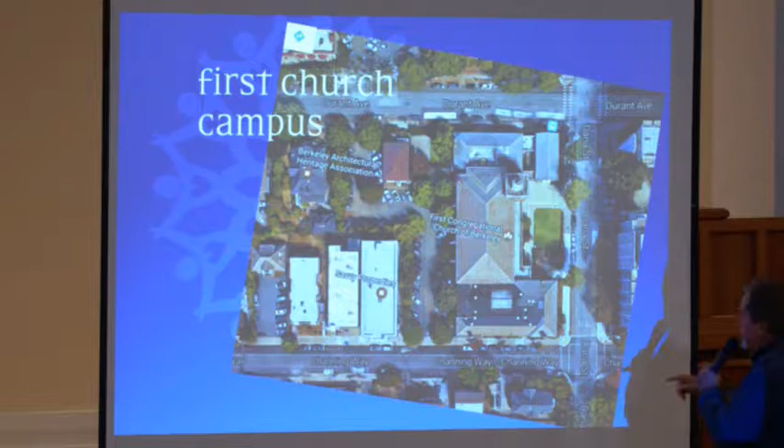Google map look at our campus. As you can see, this right here is Pilgrim Hall. This is the sanctuary. We've got the Plymouth House over here and the chapel. And then the parking lot, which sort of zigzags through here.

I guess the next slide shows the lots, right? So we'll go to there. The way that this is set up is that there is one large lot here that Plymouth House, Chapel, Sanctuary and Pilgrim Hall is on. It probably used to be a bunch of little lots, probably like this size, here, here, here, but they were all combined at some point after the church bought the building, bought the property.

The sanctuary was built first. This building was built first. It is made out of steel and brick for the most part. There's some wood framing in it too, but the main structure is a steel frame building. Pilgrim Hall is a wood frame building, despite the fact that it looks like it has bricks on it. It has bricks on the outside, attached to the wood frame of the building.

So these two buildings up here, which we're really not talking about, are a combination of steel and brick too. So they're pretty substantial buildings.

So you can see here we have this one big lot, and we have these other lots over here. We'll be talking about those lots at the third option. But right now, let's look at this lot.

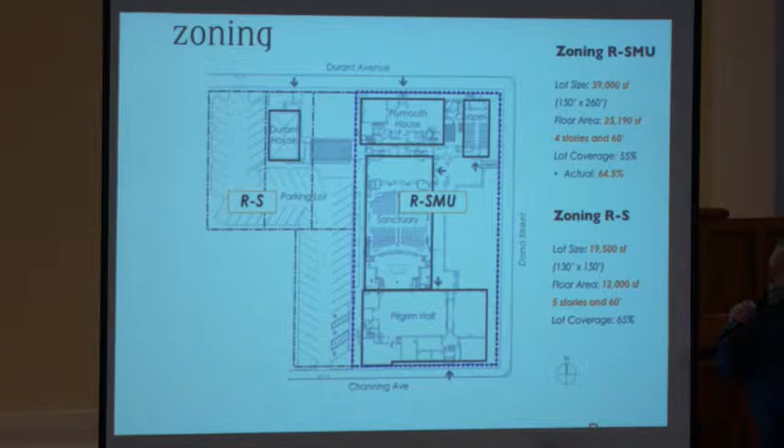We also are allowed to go another story on our building if we wanted to. That is, we could do that, and in certain circumstances we could even go higher. So let's go to the next slide here.

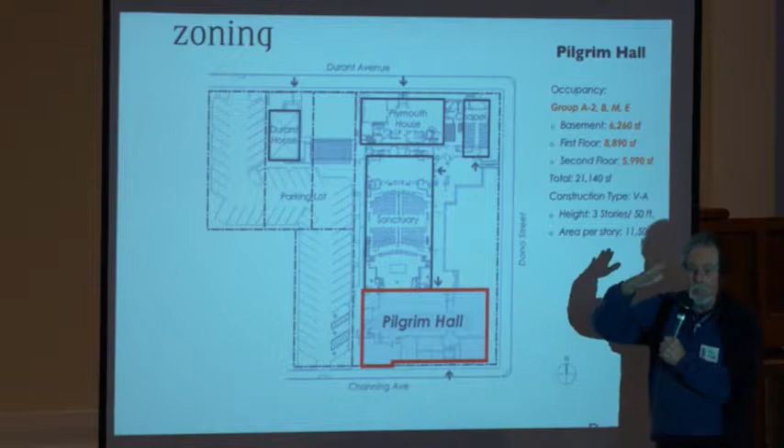So anyway, we're gonna mostly talk about Pilgrim Hall, but I just wanted to give it to you in context. Pilgrim Hall was built second, right after this building, the year afterwards. One of the things they did was build this portion of the wall shared with this building — they put steel columns inside that wall and attached them, so that the building is kind of a lean-to, to some degree, onto the sanctuary building.

And also when they built it — let's look at the next slide here — it was originally made mostly for athletics, the basketball court, and that was the main use there. There were no staff offices to speak of. There were some, but not nearly as much as it's used now. Obviously no thrift shop or anything, but it was mostly for the activities of the church, not as a community building the way we've learned to use it.

So this is just going over here — we're a high density area. The lot coverage allowed is 50 to 55%. We are now at about 65% of it.

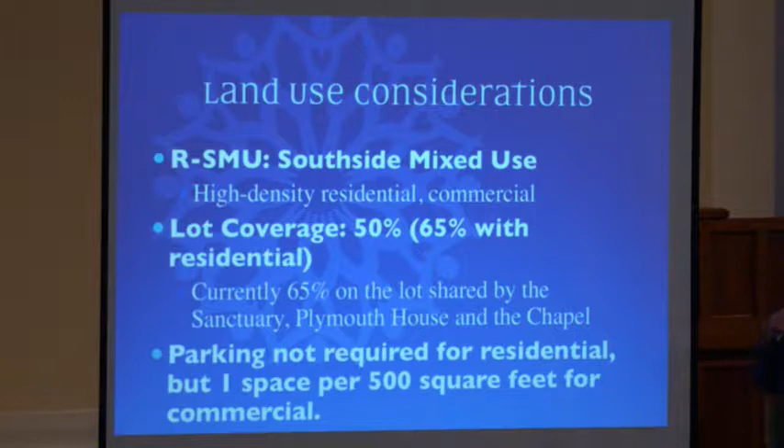There is the parking requirement — Berkeley is trying to encourage people to use public transportation. So if we were to build any residential space on this property, we would not be required to provide parking spaces. But if we increase the amount of commercial space, we would have to have one space for every 500 square feet. I think that because we have our existing parking lot, we would probably not be restricted by that. So let's go to the next one here.

So some of the issues that are going to come up, no matter what option we choose, are landmarks and preservation issues. If we end up substantially changing the outside of our building or removing any portions of it, we will have to go through a process that involves public hearings and so on. We're not actually a landmark on any register, but we are a building of note, and there could be a process where others attempt to make this building a local landmark.

So we do have preservationists right next door — BAHA is in the building right next to our parking lot. We do have a legal right to get an exemption from historic preservation laws. However, it could still be challenged in court, and it could take quite a while.

For those of you that were around when the Presbyterians did their expansion, they spent at least 3 or so years fighting preservation battles. So, the next slide.

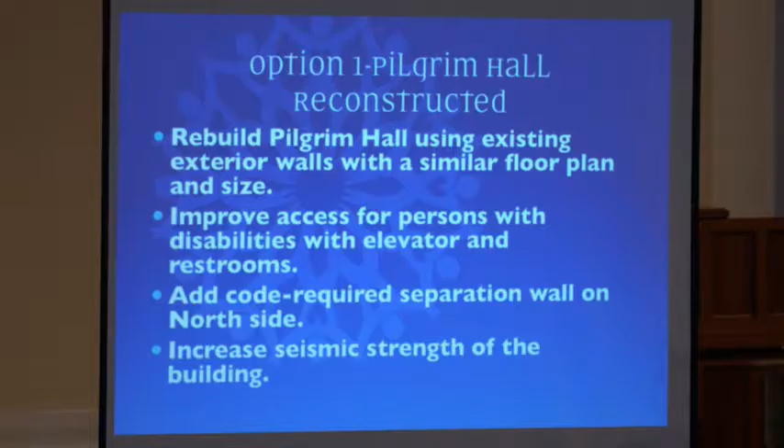It will have increased seismic strength, but it will not meet the current fairly stringent seismic code. So, the next slide here—this is just to familiarize you a little bit with what is going on.

After looking at this building and the other building, I'm not sure exactly what happened, but Pilgrim Hall was not built to the same kind of more rigid standards. It's a wood frame building, and they compromised a number of things. One odd thing is that underneath the large assembly, there's just a big mound of dirt. It seemed like, why didn't they just excavate that and use the space? But whatever, they didn't. So one of the ideas we'll be seeing is, why don't we just dig it out and use it, since it's already surrounded by walls and foundations. Anyway, that's kind of unusual.

And it also relates to the other building—the floors and everything relate to it. They knew exactly how it was going to be done. I think the two buildings were probably designed around the same time.

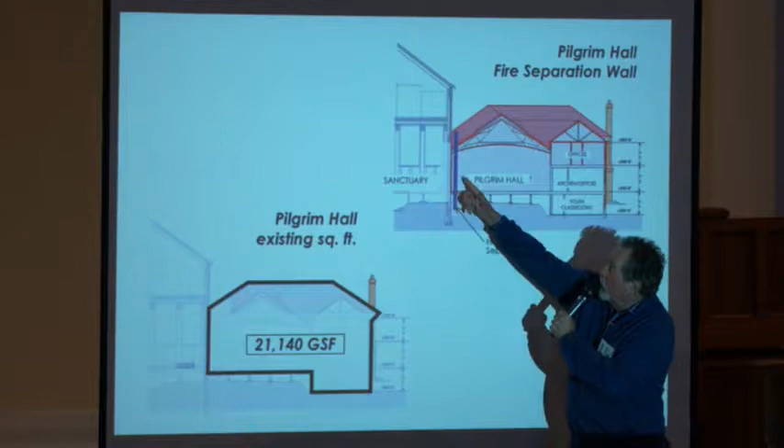So the next one here—this is where the wall would go between Pilgrim Hall, and there would be a little gap between the two buildings. If you think of the floor plans, the basement is sort of a U shape, the main floor goes all the way across, and the upstairs is sort of a U shape again. So in order to get that big, light, open feeling room, it sacrifices quite a bit of space. But there are some ways to work with that, as you'll see in the next expanded version.

So just the summary of benefits: it would be the shortest project time. We don't have to go through any big public hearings about how the thing would look. We'd just be able to get a building permit if we didn't change too much on the outside. It would be less costly than adding more space and digging out mounds of dirt and that kind of thing.

We would get some upgrades, but not a fully upgraded modern building. It would be about the same size. The interior would look all completely new—for some of the pictures you've seen, all the plaster has been stripped off, everything's gone. We would start from the bare studs, put new finishes on it, new electrical, new floors, carpeting, lighting, everything. So it will all look brand new no matter what we do. It's just a matter of how it's configured inside.

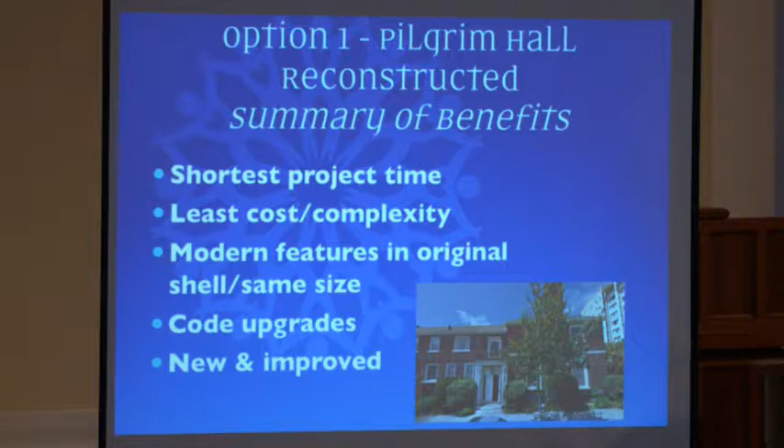Okay, clarifying questions. All right, Mary, you want to?

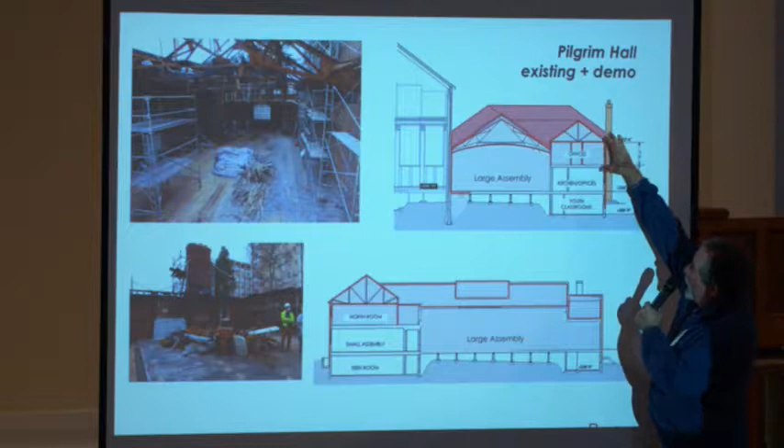Can we go back to the picture of the building, the sections? Okay, so to answer that question broadly - the seismic strength of the building, everything on the upper floor here would be completely up to grade, up to seismic code. We'd have to bring the strength to hold that up all the way down to the foundation, which would probably mean plywood on the insides of these walls. But we wouldn't have to bring the entire building up to full seismic strength, because the code says we're only required to make the replacement parts meet the exact same code it is now. So it will be partial. We could voluntarily do a lot more, and I think we probably would, because it's relatively easy - it's all opened up now.

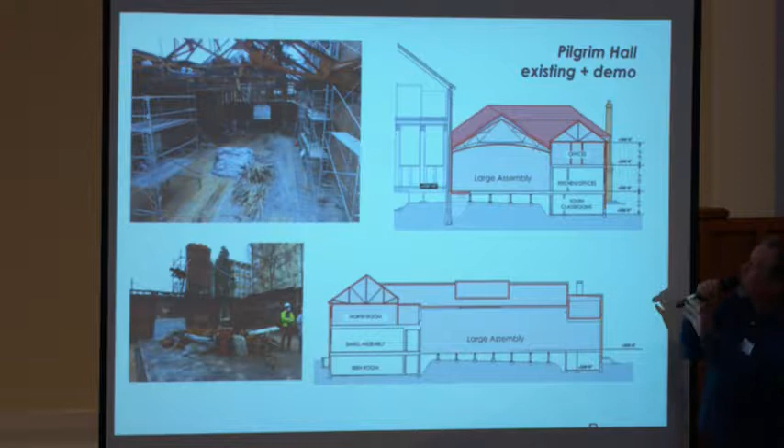Putting on more bolts and plywood would be a good thing to do. These red lines show what's gone - this part from here down has been stripped, but the rest up here will have to be removed too. So there are parts that are still there, but they'll have to come down. The whole roof, all the walls here, all these trusses up in the large assembly will have to be taken down.

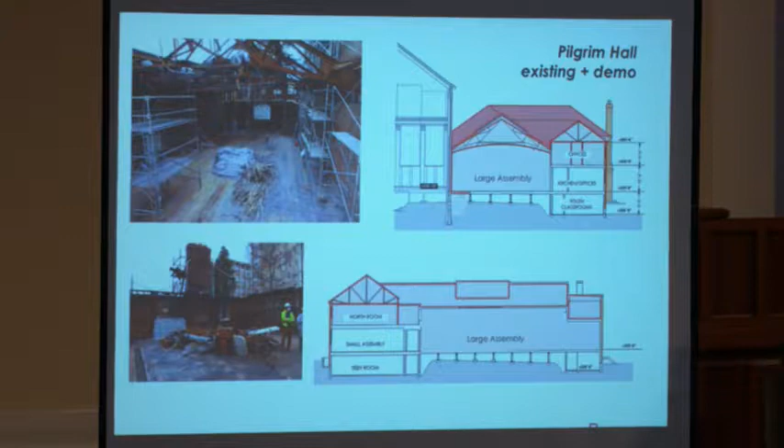Mo, over here - if we build to this plan, we won't have too much trouble with preservationists. But if we were to put another story on, could we do it in such a way that we wouldn't run into trouble with preservationists? There would for sure be more public hearings, and that depends on how we build it. If it had the same Georgian look and everything, we could do it, yeah.

I was wondering if the fireplace that's presently in the small assembly would go away, and also those chimneys that stick up that can fall down in seismic events—are they going to go away? Well, they were previously restrained by the roof, so we'd have to do some additional reinforcement to them if we were to leave them. They are almost a decorative feature of the building.

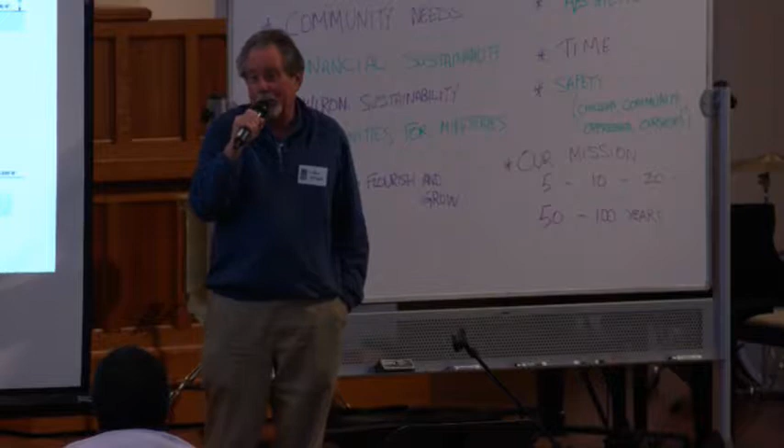Mo, just in rough numbers, can you tell us approximate cost and approximate time? Well, actually that's a slide coming up, but I'll give you a preview. We think it's about $6 million to replace the building, as we talked about with the upgrades. It will take about a year to get the permits and draw it all up, and then at least 18 months or so to build out the building.

Do you have any idea where the elevator would be in connection with all of this? Somewhere near a door to get in.

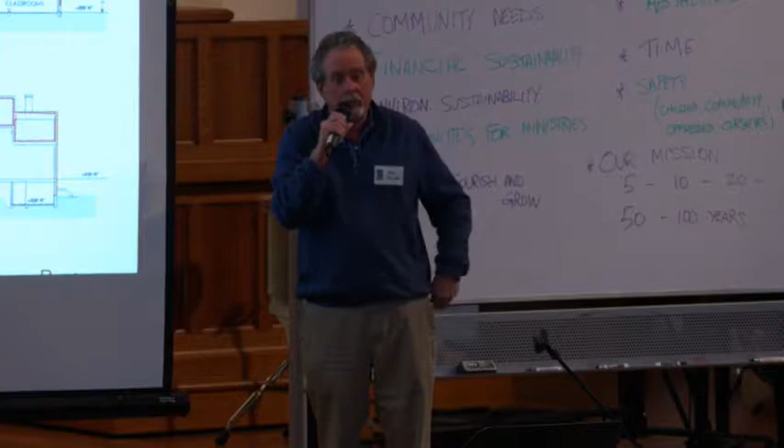There are a lot of definitions of green buildings, but the current code, which California adopted—called CalGreen for short—essentially makes almost all buildings LEED silver or gold, as it used to be called, without all the documentation. There are higher insulation requirements, higher efficiency lighting, high efficiency heating systems. So it's pretty darn green—a lot more efficient than that building was in September of last year.

Maybe we need to do the next group here. Hi, Mo—I wondered if the issues of historic preservation are linked with the need for community meetings. In other words, when in the initial slide you talked about needing to have the neighborhood review plans, would that happen no matter which plan we have, or only if we deviate from the current frame?

Okay, so in Berkeley there's something called the Landmarks Commission, which deals with preservation issues. If you're not changing anything on the outside of the building, you don't go through them. There may be at least one level of design review, done by the staff at the planning department. But if we didn't really change anything on the outside, there would be no public hearing about that—there would just be a design review, in any case.

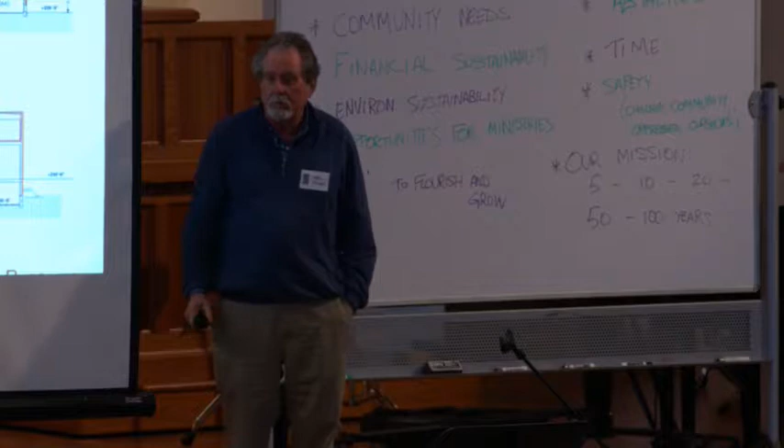Good morning, Mo. Right here, Constance. Hey, what's up? So, Constance.

I have a question about the bricks, because we kind of mentioned it, kind of not. So if we don't use the bricks, can we sell them? No, I'm being serious. Those bricks are all covered with mortar. Maybe we can sell them to members of the congregation for sentimental value, but otherwise they'd look like a pile of bricks to anybody else.

So we're going to move on to the next group. Could I just ask one clarifying final question of Mo? You commented on the time frame—could you just restate that? Did I hear one year for permits and a year and a half for construction?

The time frame is going to be—we're going to compare all the different options: money, time, this and that. So when you're familiar with the options, you'll see the different time.

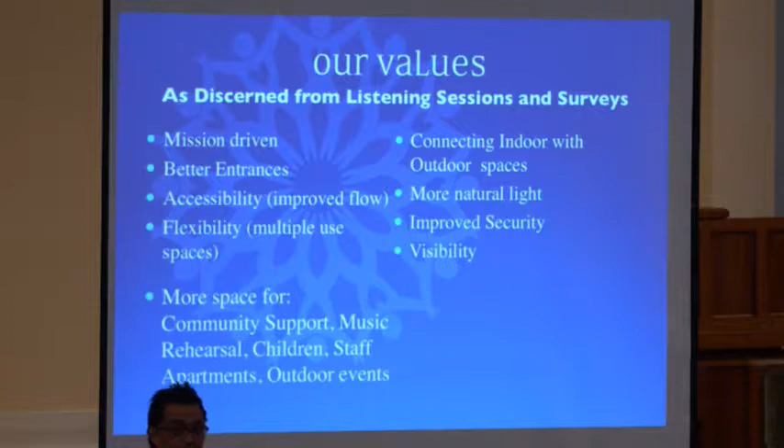Option 2 is born of an idea of what we think now is going to happen for the next 100 years, hence the title of the program. It comes from just planning, from the idea of being a master builder, an architect. You envision what the building might become, and you design and build it that way. But where you start is you go back to your values, what we determine through listening to people, what we understand is the mission of the church. We go through these values and look at better entrances, accessibility, flexibility, connected indoor-outdoor spaces, more natural light. All of these are the parameters an architect uses to understand what the space is going to look like.

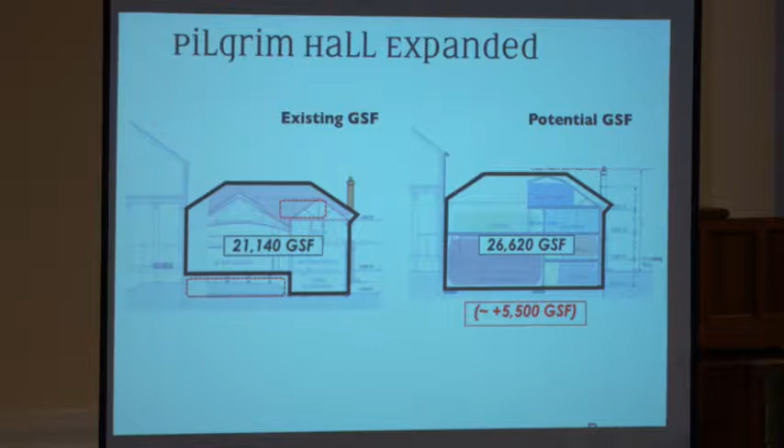So if you think about what Mo introduced, the idea of utilizing this space a little bit more, just by doing that you already add an extra 5,500 square feet. That's where we start. We use the same exact shell, not exactly the envelope, but the same shell. So within that same shell, what can we do with it? Now this is only an option. We don't necessarily have to stick to that height restriction, as Mo said. We could go one more story.

We worked with Radcliffe on this and developed these planning themes. They're listed right next to each other so we could get a sense of what the spaces look like relative to how they're meeting our needs right now. So that's the campus.

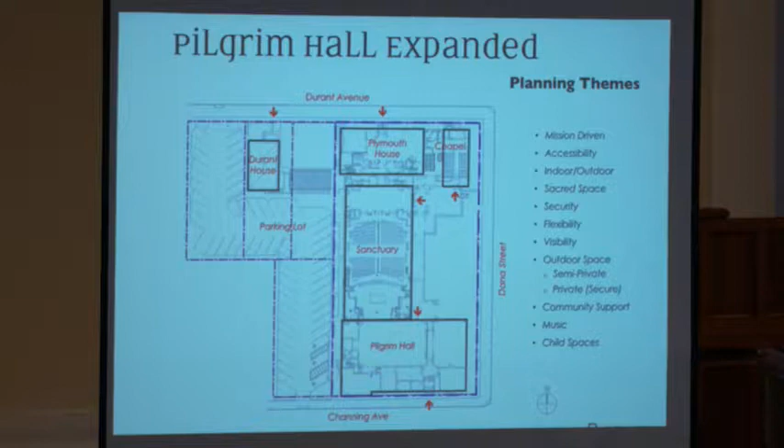In doing so, you start with a couple of different concepts. As a designer, you think about flow—how do you get from one space to another? The first thing we did was create a circulation corridor, in essence, that meets the entire campus. So if you were to walk through this corridor, you'd see all the spaces you're using, needing, and experiencing.

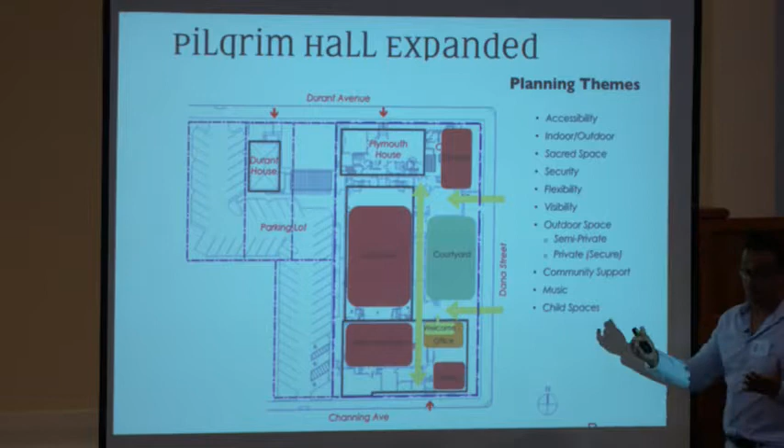The other concept is, with that circulation corridor, you create a central hub that may become the main entrance. In that space you'd have a welcoming reception area—semi-public, semi-private—that allows people to walk through, and our receptionists can see them and greet them, which is something we just didn't have before.

Let's see, move on. Whoops, all right.

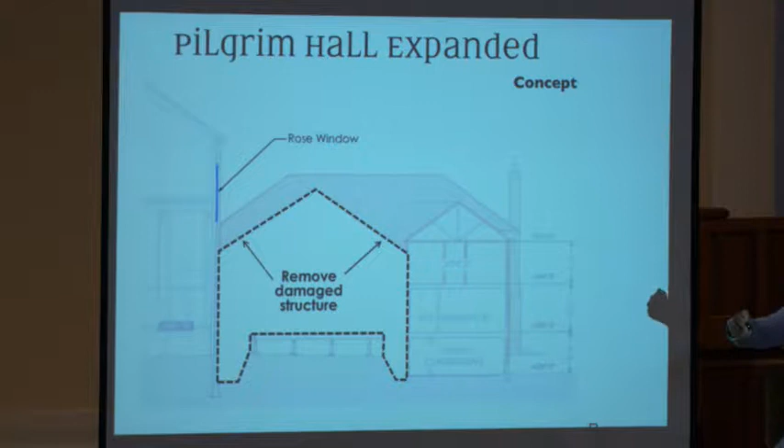So we remove the damaged structure, and we go to the walls that we talked about. The separation comes from seismic concerns, of course, but also general movement. What you really want is your roof loads to be transferred down to the foundation, so you really need that wall.

We can certainly rebuild it to match. We've got the roof in place, in space. We've got the classrooms down here.

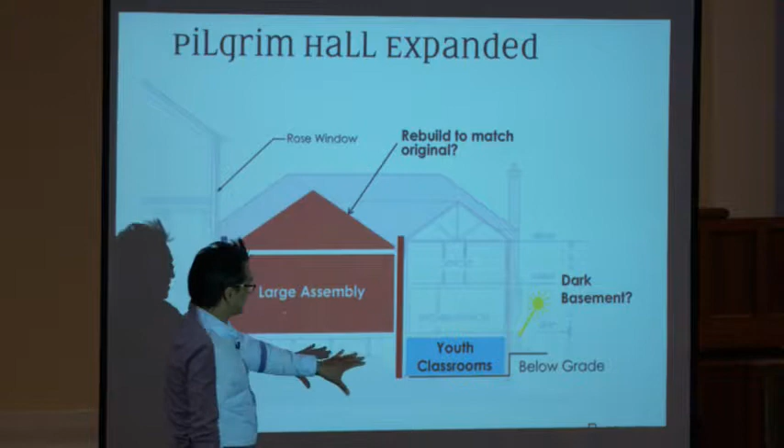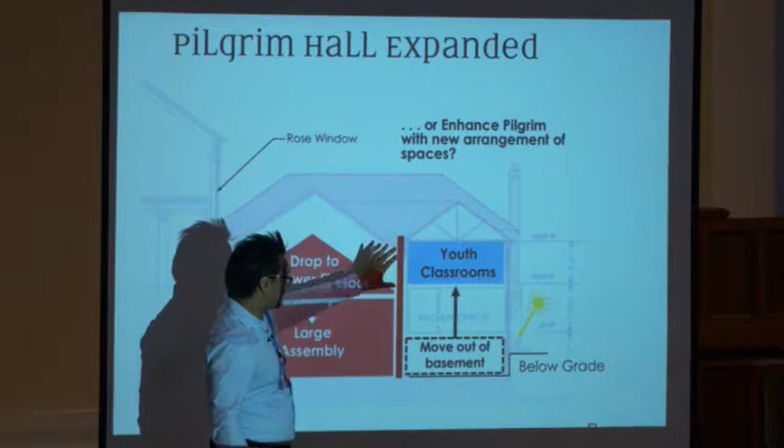Not so great. But we also understand that we don't necessarily need to pitch our roofs to get positive drainage. So what if we drop the large assembly to the lower floor, excavate out, drop it down. We could then move the classrooms away from the basement somewhere else. Flatten that roof, and all of a sudden you have classrooms and youth spaces accessible to a roof area, garden.

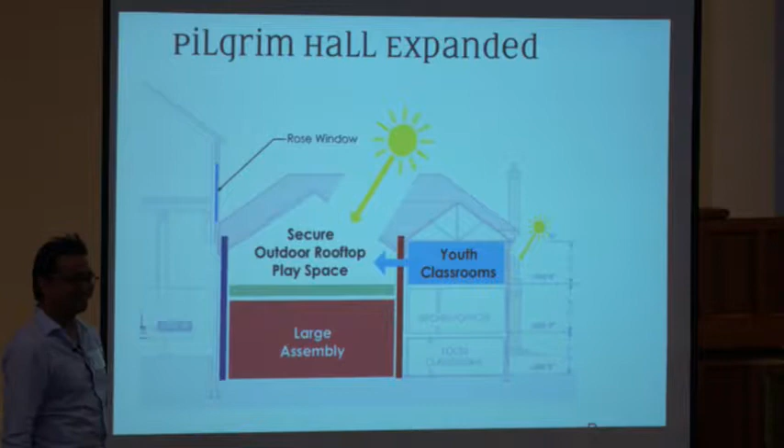Sun. See, wow, kids like sun, that's great.

As you move through the design process, you start thinking about what else can happen. We go back to indoor-outdoor spaces and the connection between them. That's a really important part of our design—living in California, we have the opportunity to blend those spaces together. So we want to create as many opportunities to get outside as possible, as good California designers do.

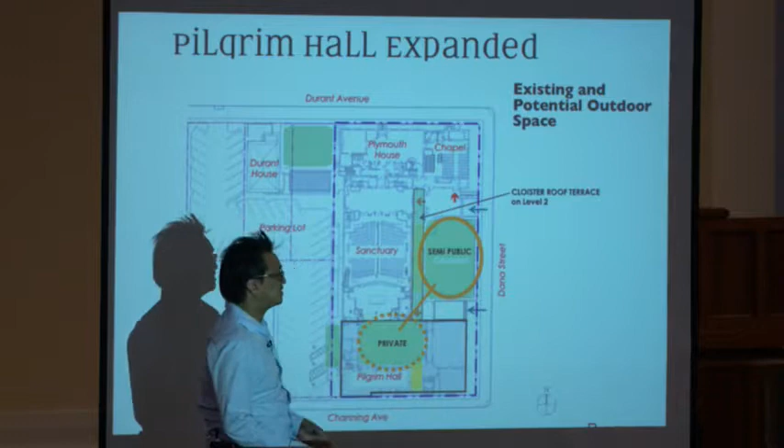We currently have a pretty nice semi-public courtyard that could be made even more public, a little more inviting. We just introduced the idea of a roof garden space. We've heard a little about a cloister roof terrace that may be used for a gleaning garden. If there are some live load issues we can address to make it a little stronger, we could possibly do that.

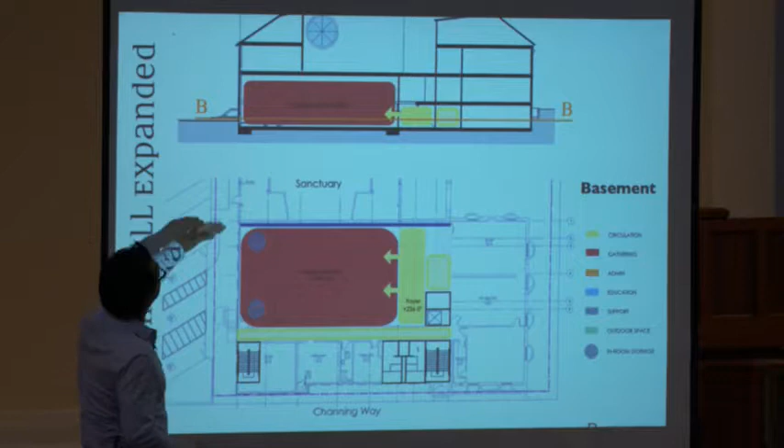Something else we will get to is introducing yet another blending space. By dropping the large assembly down, what we do is create these two U-shaped spaces below and above the large assembly.

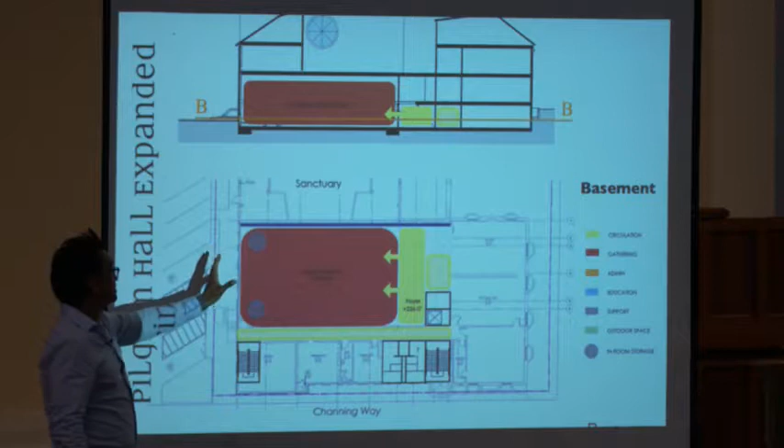If we drop it down, we don't need to create a U space. We could actually move it out to the edge of the building. That way it gets some natural light, though it doesn't need that much. It needs just enough to be a beautiful space, because oftentimes we do shut the drapes. We want to control the light.

We have a lot of slideshow presentations at the 9 a.m. But that would be something we could easily control with one wall.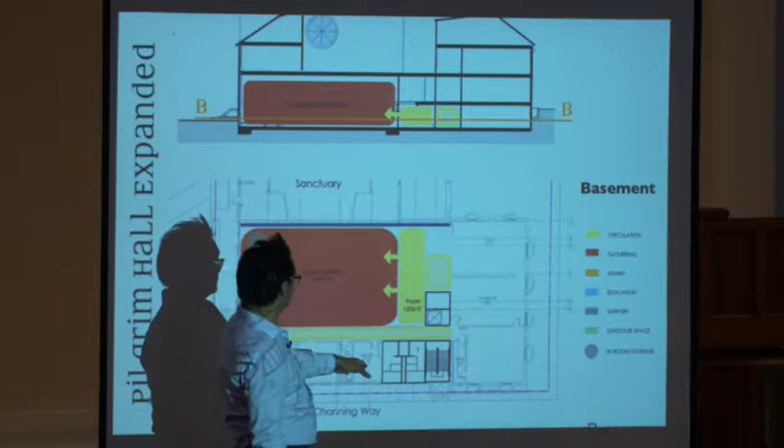You could see that circulation corridor is right there. As if you were moving through the space, you'd be able to see into the large assembly. You can see that there. Is that the elevator that has the... Yes.

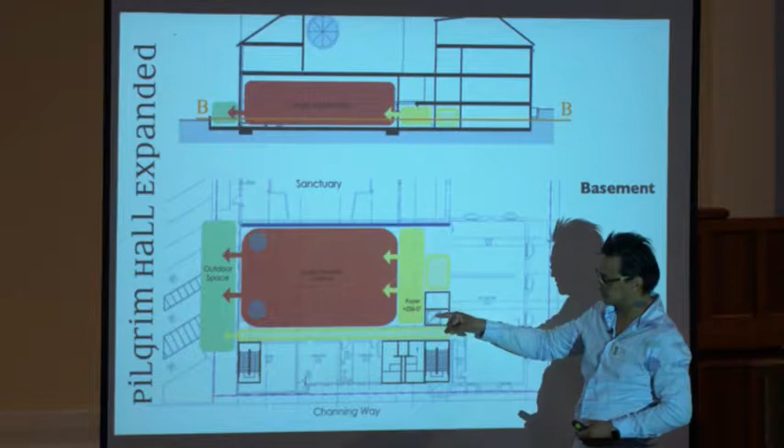So this is— they took the design concept pretty far into it. So you have a part of your circulation corridor that is vertical circulation. That's an elevator, stairs, and you'll see all these utilities in the same space.

You could actually design that way, thinking about being effective by placing things in very logical places. So you have your plumbing in one wall, your circulation in the same space, so you're really being efficient about what you're using there.

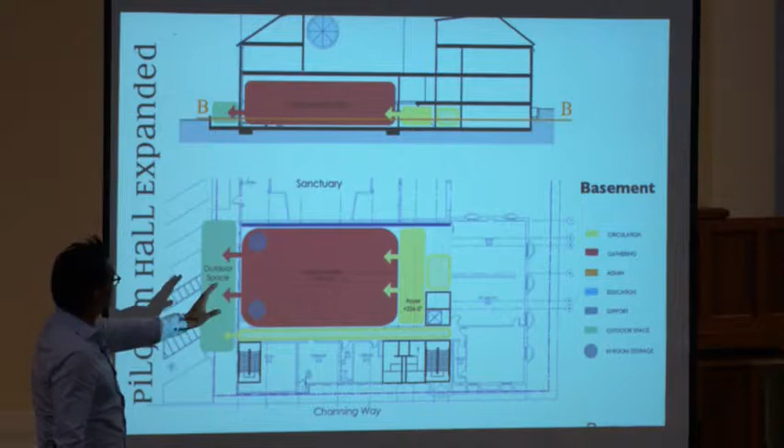So the large assembly being pushed out to that side of the wall creates an opportunity to meet the parking lot in some way. One of the things we were very conscious of as we went through this exercise was, can we ramp to the large assembly if it's down below? And it turns out we can.

This outdoor space can become a ramp that allows wheelchairs and strollers to walk right into the large assembly. And it can become a garden right outside of that window we can see. Next one.

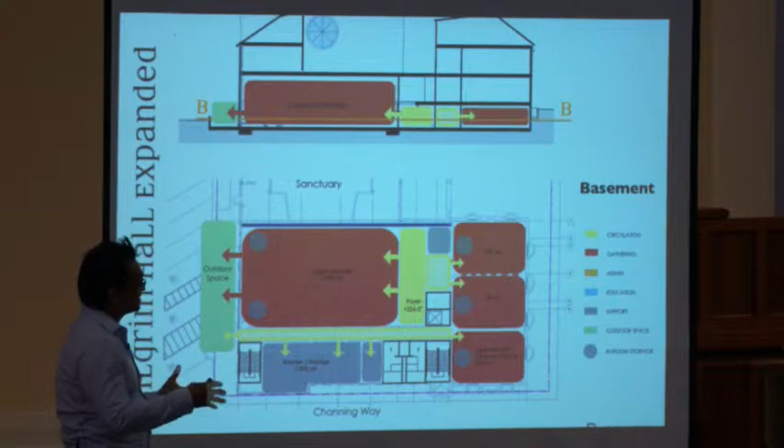We want to get a sense of how these spaces can be sequenced together. The large kitchen we heard so much that we want to build can be right down below, accessible to the parking lot, so easily accessible to get food in and out, and also serve that large assembly, which is probably the main room it's going to be serving anyway.

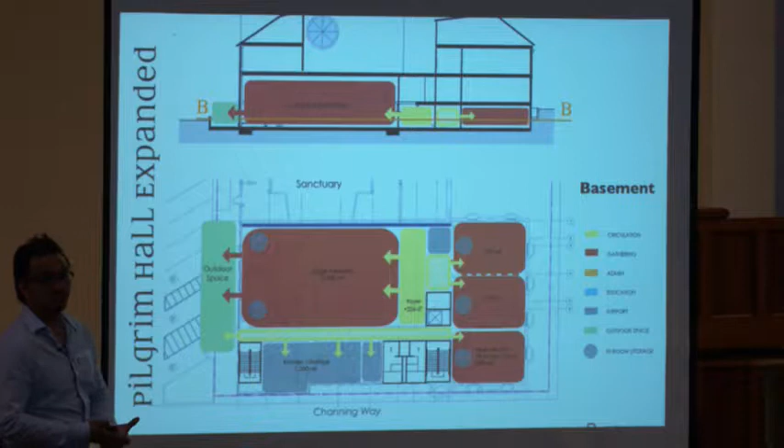Let's go to the next. Again, flexible spaces—we thought about how the spaces can be flexible. We don't want to necessarily assign or attach ourselves to what these spaces are, but that they can be something. When you put spaces down below, you want to think about what they might be used for.

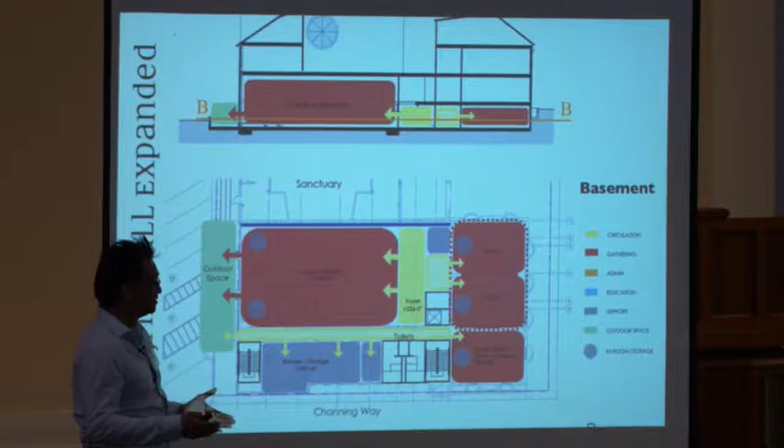Do they need a lot of daylight? Should they be very well protected from the street? For example, if you're doing recording, the thing you don't want is a lot of bus noise, which we would get. So you shove that down below grade so that the earth becomes a natural sound insulator.

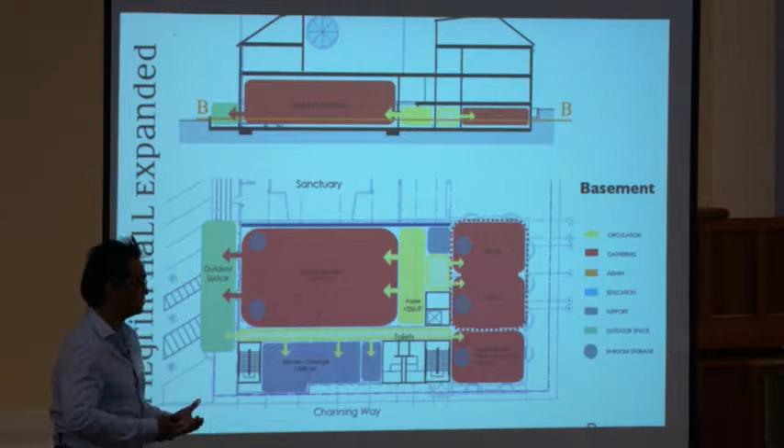And then these spaces can be very similar. Maybe if we decided to have film viewing, that would be a very good space for that.

Lorenzo, the text is pretty hard to read from here. Maybe you could just read the names of the rooms, even though the rooms are not assigned purposes other than the large assembly. Large assembly, and this one down here is the music room, warm-up space, and these are undefined.

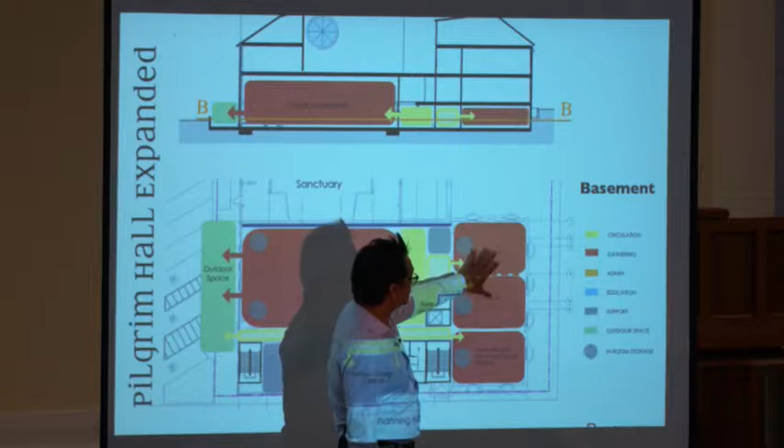So you'll see circulation is yellow, gathering is red, administration is orange, education is blue, support is gray, and then outdoor space is green.

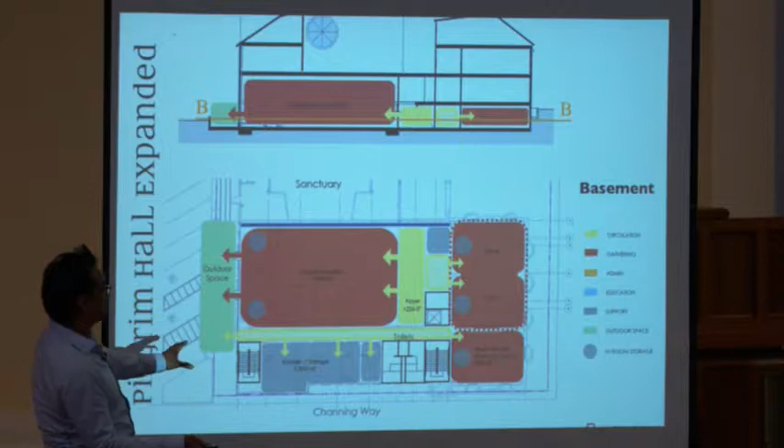We're just in the basement right now. We'll get up to the library in a second.

Again, a lot of unspecified spaces. Could we get to the next slide? There we go. So now we're up at level 1. Again, we start with circulation, entry space, a welcoming space.

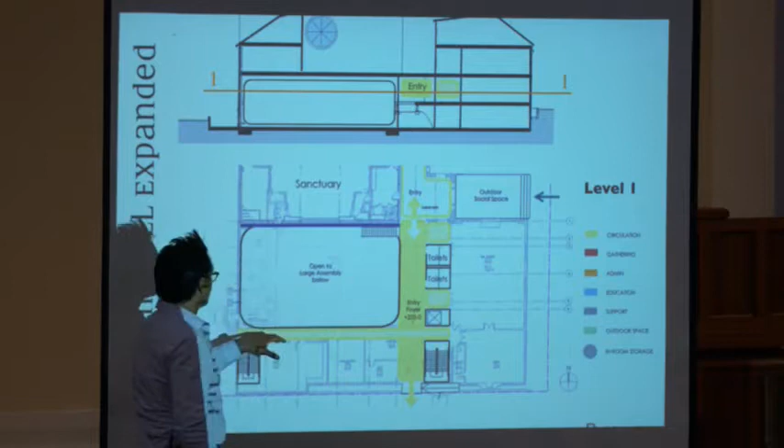So as you enter the Pilgrim, you'd be able to see into the large assembly through glass windows and see down below what's going on in there. And those are the offices. So again, this was a semi-public space so that we could see and welcome people in. Some offices would be in here, small assembly here, right next to the library.

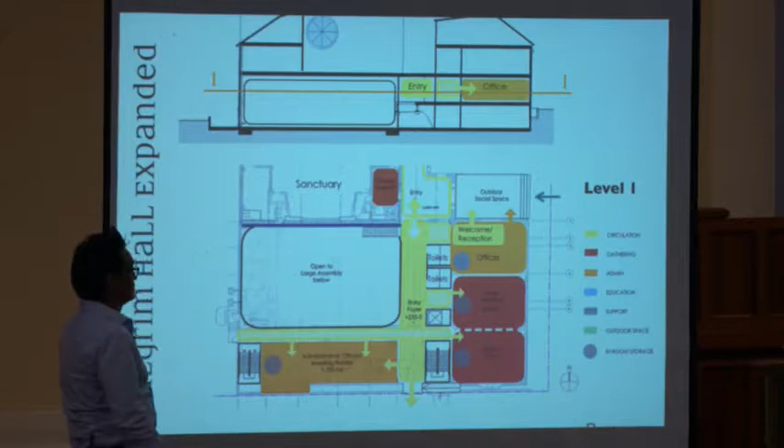And of course, one of the things we heard from the staff was that they really wanted to be on the same floor. Imagine that, they like being with each other. Next slide will show that we could actually create a bigger space out of the library and small assembly. And again, we're just playing with spaces and seeing how they could work.

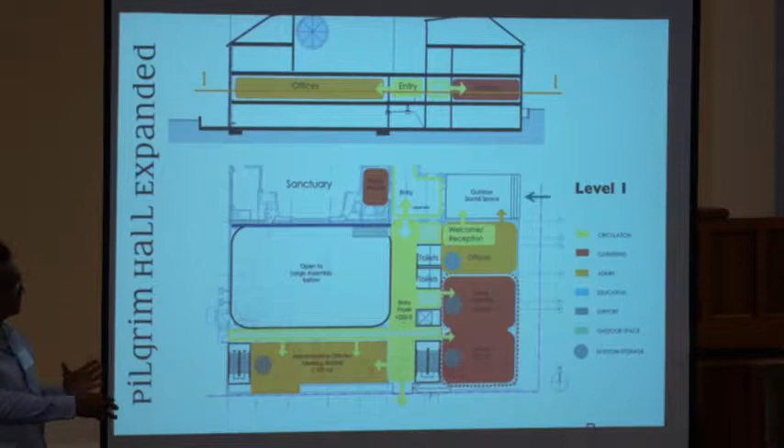When Dan talked about the 24-hour prayer chapel, we imagined that maybe the bride's room could actually become that. So with this hub space, where you could see everything going on, there's actually a level of security built into the idea that it's a 24-hour space.

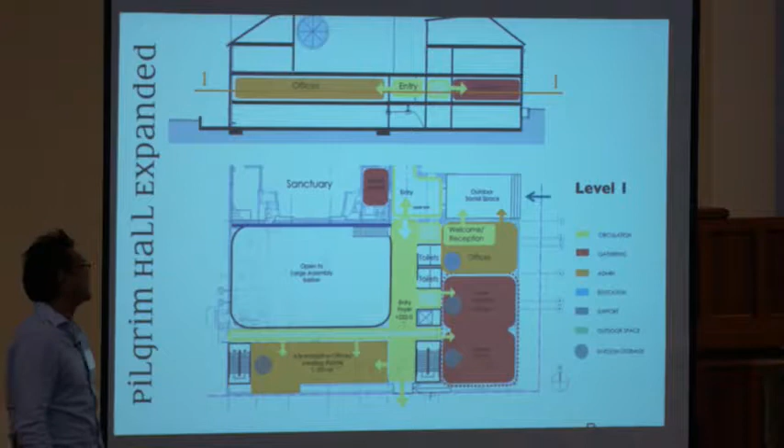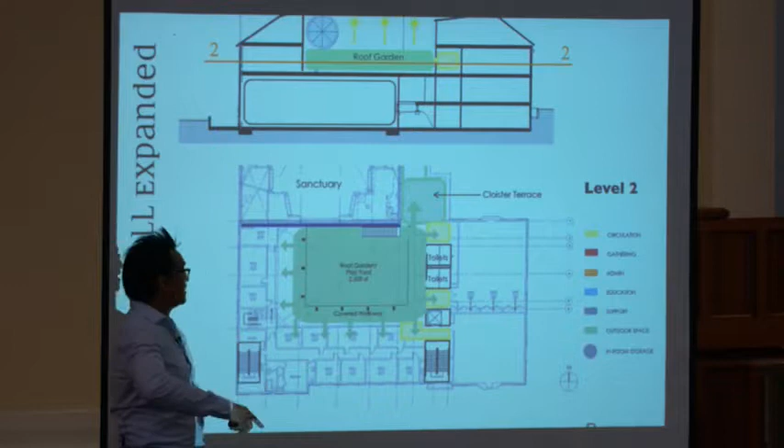Okay, next slide, and then you go back. The design process is iterative in the sense that you play with spaces, you go back outside, and you see how those spaces interact with the outside, interact with your circulation. So of course we thought about other things, the cloister terrace, the roof garden, and what does this private outdoor space above serve?

Next slide. And it serves the classrooms. One of the things we heard a lot of was how wonderful it was at Bethel to be able to see the children just walk right outside from their classrooms. And I think that was something we really would like to see happen in the option 2 iteration.

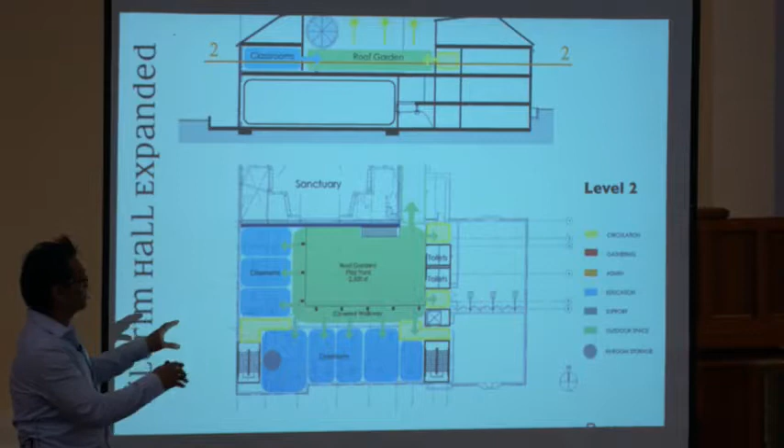Next space. And we could also add other things that can access this roof garden, the private roof garden. Now remember, since it is primarily children and youth space, this would be a completely locked, completely private space, so that the public could move through the public and semi-public spaces, but this would be protected.

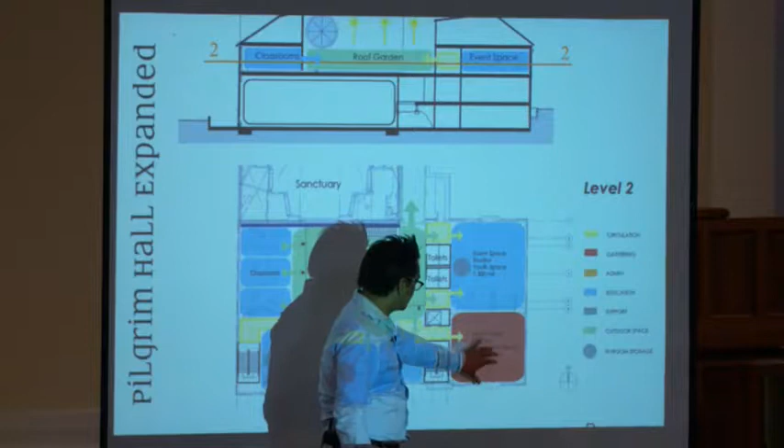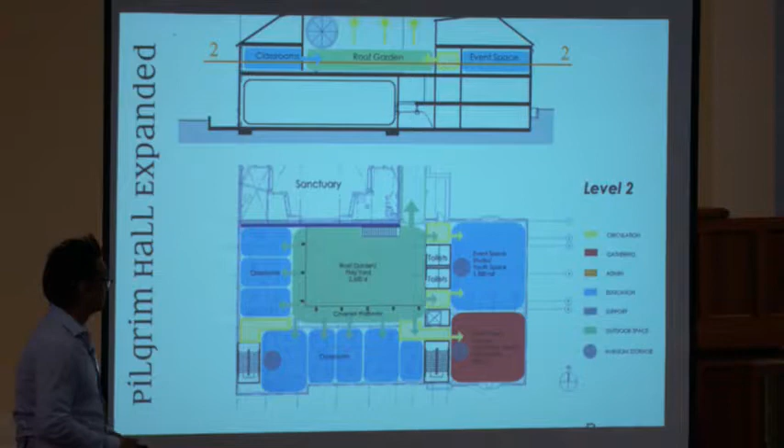And one of the great ideas we were playing with, I think this is wonderful: upstairs, during the week it'd be a staff lounge with some sofas and a kitchen, and some co-working space, so you could bring your laptop in there and work. But also on the weekends, it could be a parent space while you're waiting for kids to come out of Yes or Winthrop. You hang out in there. If I had my way, I'd put a bar in it. Juice bar.

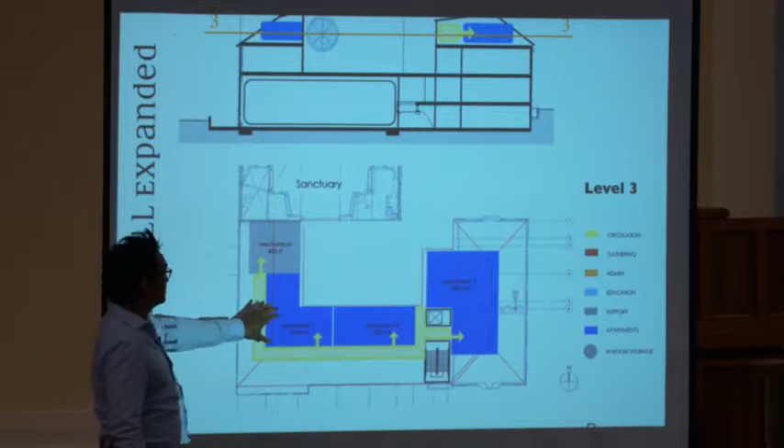But what this also opens up is, even within the same roof structure, you can actually put apartments right on top of these classrooms. Now, the apartments would take advantage of the fact that there's light in that courtyard as well.

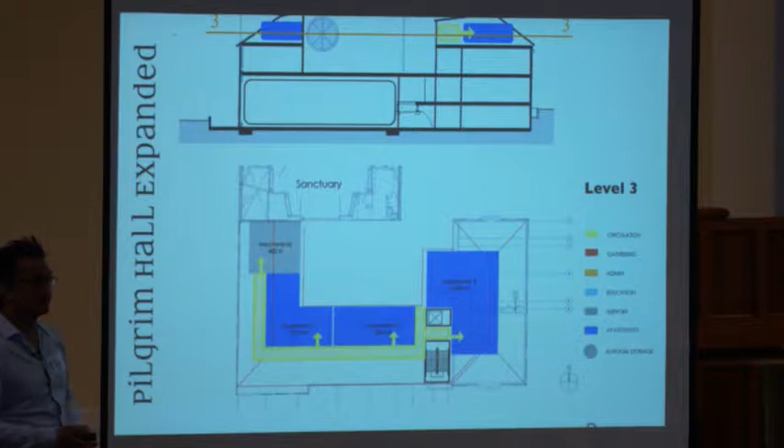And one of the things that Molly really encourages us to do in whatever iteration is to help with housing of staff as they move in. We're not going to be able to get the greatest staff if they can't live here, if they can't afford to live here. So I think that's great. We should have the ability to house people who are coming here.

I think we could probably go to the next slide and see how Radcliffe has done it in other spaces. For example, this is a podium roof garden with classrooms around it and apartments above it by the architect Ben Levy, for a synagogue. So they built this for them, and it works beautifully for them.

And the idea is to just think in ways of how we could stack these spaces to get the most use out of them. That's what starting from, in essence, it's not exactly scratch because we're starting with a shell, but it's just one option.

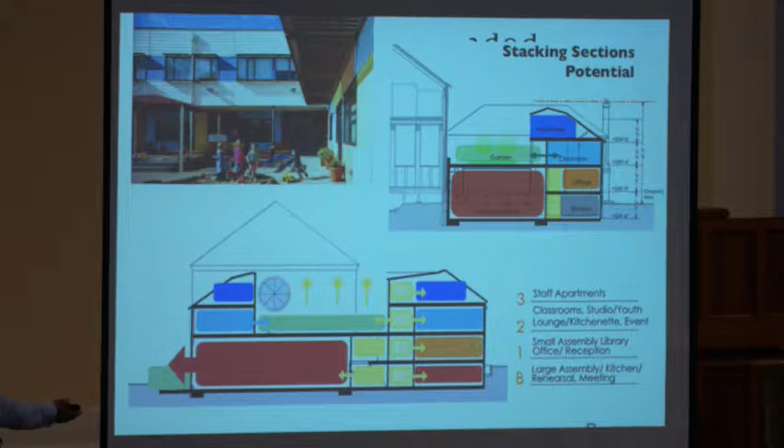We could go, if we wanted to, and work with the public, there's nothing wrong with engaging with the public hearing process. We are a church community. We should be involved in the public hearing process. We should be engaging with the public more often. And we could maybe break this roof line and add another story. It's an idea.

In response to congregations visiting for programming and ministry, you want to think about what options we need for the next 100 years. We want to plan for what the church is going to be like.

Because the spaces are so much more usable, and just having the modern kitchen, the potential for higher tenant income increases, of course.

I think that's it. Oh yes, clarifying questions. I think Julie had her hand up.

Since we're staying in the same envelope, does that mean we avoid the whole preservationist issue? With this option? No, I don't think we're going to be able to. This option imagines that we start from scratch in essence. We're using the same envelope or same shell, but we want the design process to dictate what the exterior looks like. We want the design process to inform the aesthetics of it, so that will be met with public hearings.

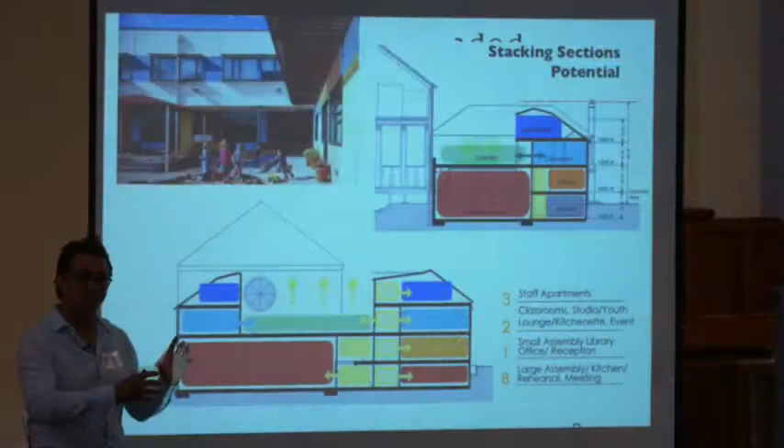I see that the small assembly is going to be divided into an office on one end and shrunk that way. Yes, in this particular playing with these spaces, this is not anything truly specific. We're just talking about central hubs and how flow and spaces are organized. Yes, it is, but it can be combined with the library so that it can be opened up into a larger space.

I still don't see the cellar thrift shop in the expanded plan. Yeah, and again, we had a lot of unspecified spaces that we need to understand what our program looks like. The cellar thrift shop can be one of those spaces. The names of the rooms have been intentionally left as a function rather than a designation so that we can consider what we want to do.

Rachel? Is the corridor, would it be enclosed or would it be open? Which corridor? Okay, so right, circulation is going to be enclosed within Pilgrim, but we want it to visually tie to the cloister so that we have this understanding that you move through the space from within and from without. So that's part of the design intention there, is to really make that corridor, that circulation, clear.

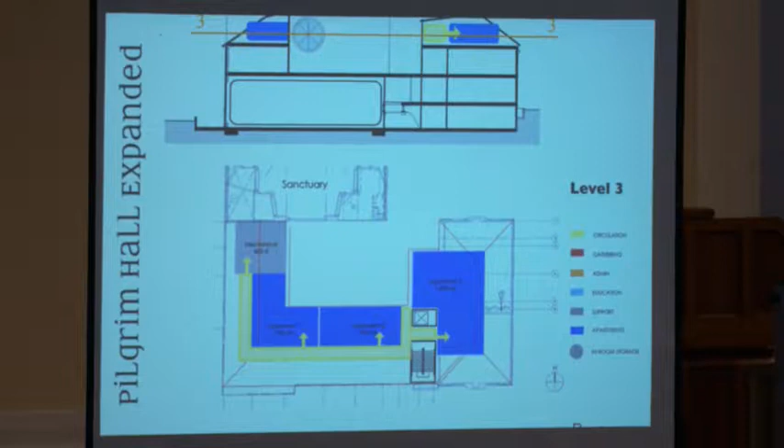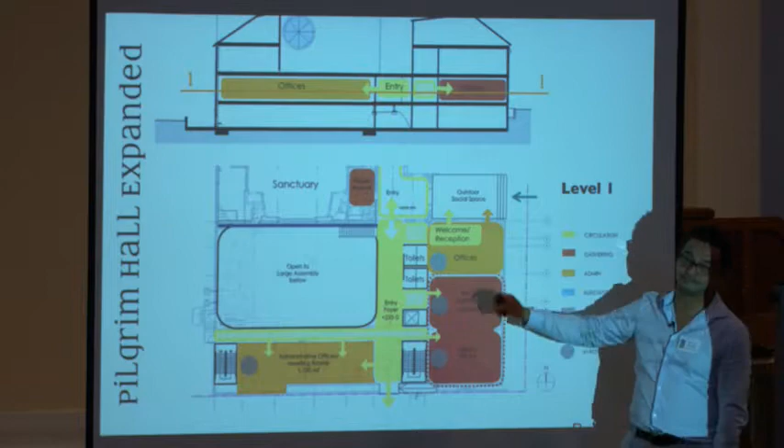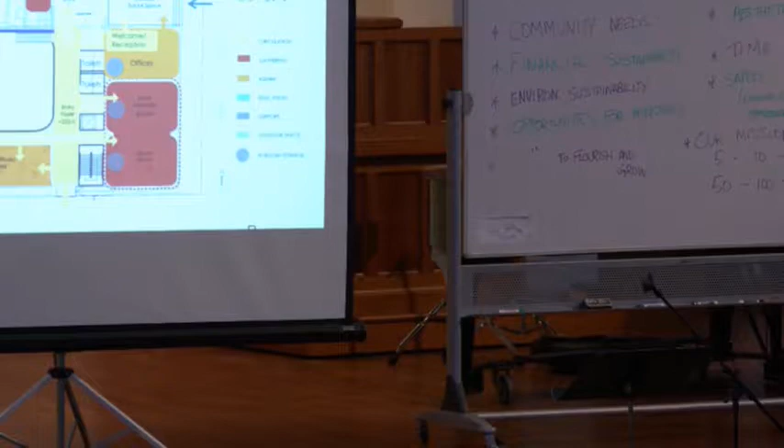Hi, I'm John Coates. Could you talk more about the light into the large assembly? The first slide you put up, pointing at the classrooms already down there, was saying dark, yet you're putting the large assembly on the same floor space. So the only natural light's coming in from the parking lot. That's correct, that would be the primary natural light. What we also envisioned was, since we have a separate wall, we might bring in light from this wall as well.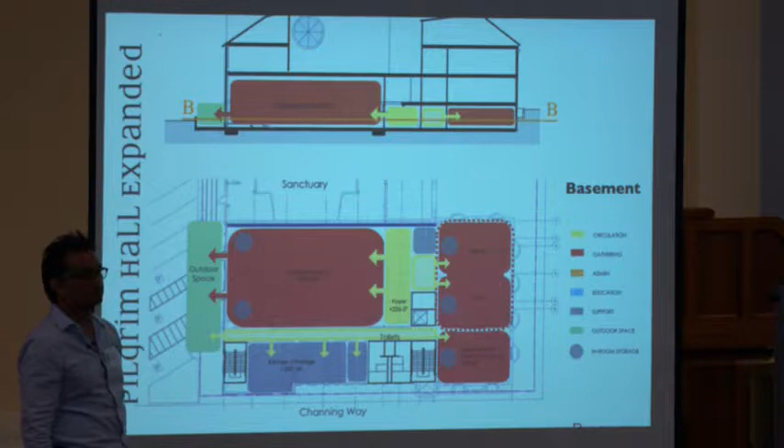So there are two ideas with this concept. One is that the wall between the large assembly and the outdoor space could be entirely glass and light the room. Or you could have a glass wall between the sanctuary and the large assembly, exposing the brick with natural light flowing down. The options are really unlimited, it's up to our imagination to choose a path forward. This is but one iteration at 5,500 square feet over option one. We can go with 2,000, we can go with 10,000.

Is the rooftop garden a play space, and if so, would the East Bay School for Boys have access to that? I think as we envisioned the rooftop garden, we envisioned it to be really private space, and the idea is to create a secure outdoor space. We talked about maybe having it be an outdoor chapel, maybe a play space, maybe a place for a labyrinth. There's a lot of things that could happen out there, but I think the primary thing is it serves as an outdoor space for the rooms around it and above it.

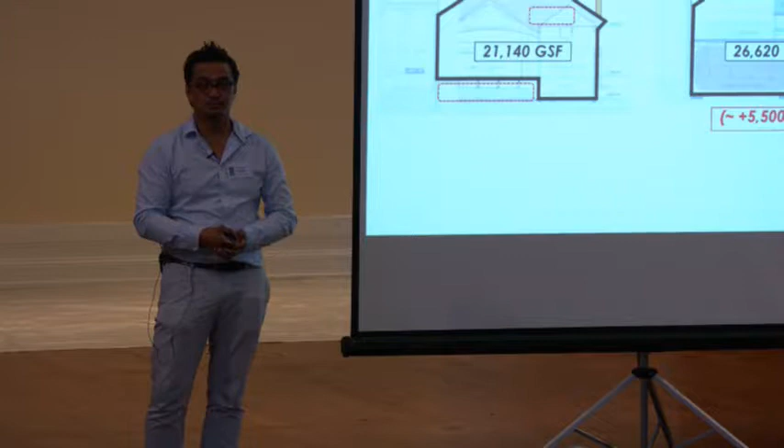I know Paul had a question, that Rick. Mine is sort of a combination of something Mo mentioned, the percentage of our total lot size we can use. Does either of these two plans force us to go to a smaller footprint? Maybe that's not what he meant, but it seemed like there was an idea that if we remove the building, we then have to conform to a smaller percentage of the total lot size. Did I understand that correctly, or no?

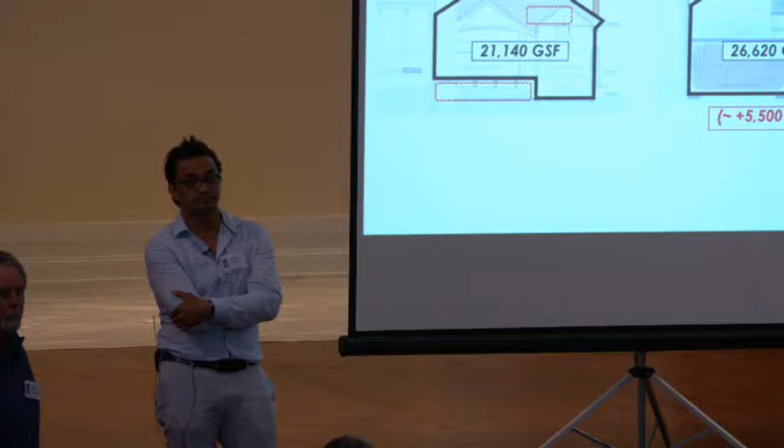Mo, could you help out with this question? I think he's restating Mo's comments correctly, in that if you remove the entire building, you do face additional restrictions. This concept, which was done by Ratcliff, we didn't ask them to make this concept. What we gave them were 3 summary documents and a series of meetings with them, and they very cleverly came up with this concept within the same footprint, same foundation, with the same wall constraints. They would recommend we dig 2 feet deeper and start with a new foundation, because that would remove the height limitation on the ground floor from 8 feet to 10 feet, providing better acoustics for the rehearsal room and a much nicer feel in some large rooms on the lower level. So again, this is just a concept, premised on the existing foundation and walls.

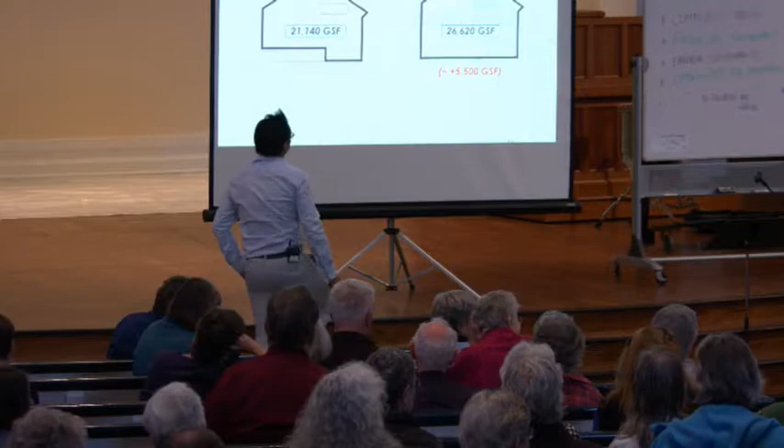But if we were to add affordable housing units beyond staff in Pilgrim Hall, you could easily get up to 45,000 square feet here if you wanted to put on floors 4 and 5 and have 20 units. So again, this is but a concept. Somewhere between 21,000 square feet and 50,000 square feet is a choice that we can make collectively.

But just as a brief imagining of what an extra 5,000 square feet would look like, you can actually imagine just going up one more floor, having 3 floors exposed to that garden. And that exercise was very intentional to stay within the existing foundation, existing walls, and existing limitations.

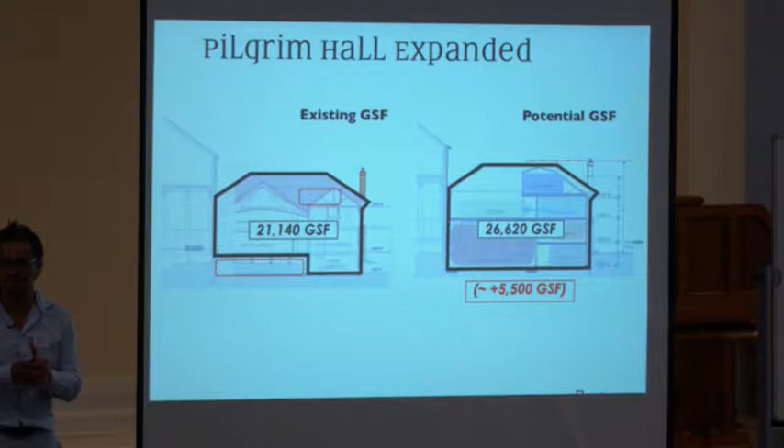The difference between shell and envelope: envelope is a technical term for the basic protection of the interior building from the exterior. The shell itself is just the outline. Ratcliff really wanted to stay within that shell as a practice, as a way of giving it some constraints.

The follow-up question was, are we talking about the actual existing walls? My analysis of the building paper as a waterproofing expert is that it shouldn't be used. We would need to take the brick down, and if we want to put the brick back up, we could certainly do that. But it would be below the standard of care to use the existing built kraft paper, so we'd need to take the paper down and put up new waterproofing around the structure. Other things can also cause the structure to need to come down - too much water exposure, termites, a number of different things.

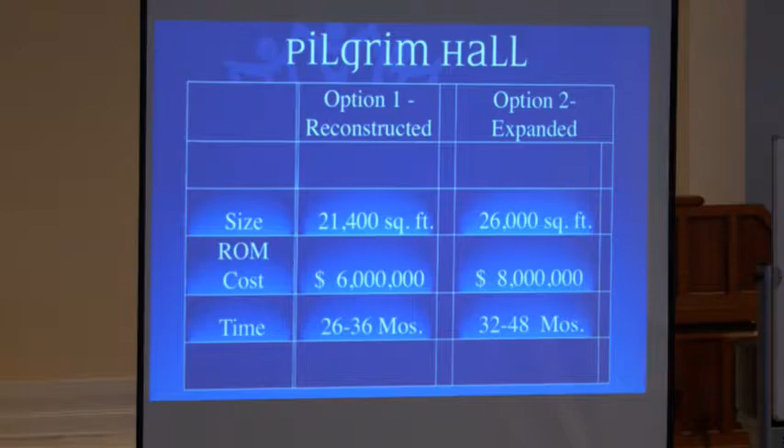I would think the planning time would be longer too - it could be a couple of years or more. So then what do those times mean? That's the total amount of time, including permitting and construction - it's not just construction. It will be permitting and construction.

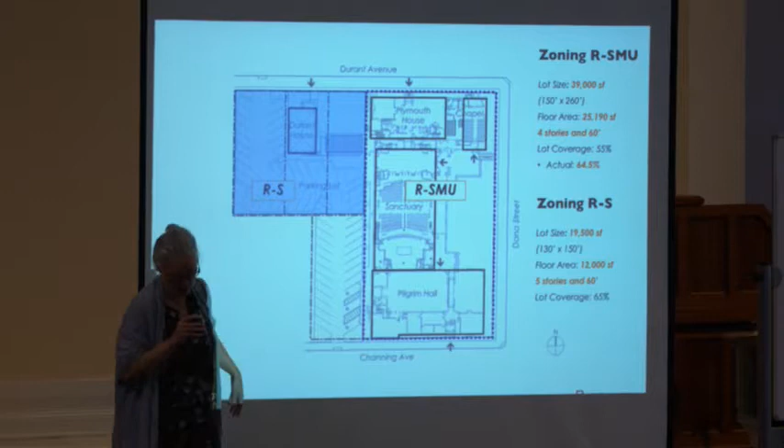I shaded this lot here, but what it's not showing is that we're not looking at a rendering today of what the affordable housing could look like. It's not even showing setbacks - this is just filling in the lot. There will be required setbacks, which are the requirements that when you develop the lot, you need to set back from the actual lot line so you're not covering your whole lot all the way to the edge. So maybe a 10-foot setback here, so you're not covering the whole lot. That's a setback.

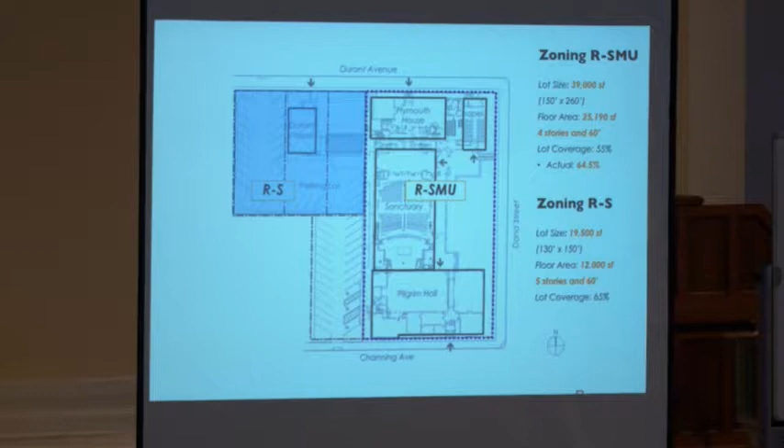So let's go back to the prior slide. When we're talking about this third option, we're talking about a nonprofit affordable housing development.

It would be owned and managed and built by that developer. Just thinking broad brush about what could happen on this site, we might look at 1 to 2 floors of subterranean parking and a podium structure with affordable housing residential floors above that. It would be rental, as far as 100% affordable, meaning they're paying affordable rents versus the skyrocketing rents we're seeing that are unpredictable and keep going up in this area.

As far as what it is, and we'll talk later about a path forward, I think our church, if we do this, would have a lot to say about what we'd be looking for as far as who is living in this development.

Unfortunately, there's need in all these groups. Families need housing, senior citizens need housing. It's a growing population of seniors, and special needs units would refer to units for frail elderly, or people with different types of disabilities.

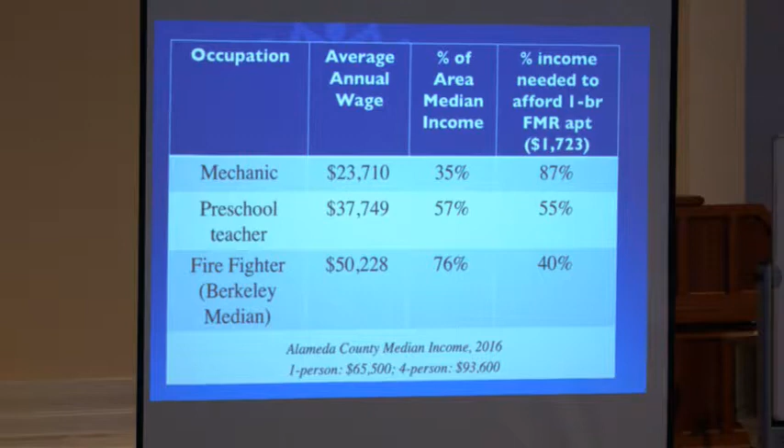So this report I was just mentioning, I just saw it yesterday. You can look this up: Out of Reach 2017, by the National Low-Income Housing Coalition. Maybe when we send out our materials, we can send a link to this. It looks at the hourly wage required to afford, in their case, a 2-bedroom fair market apartment, and you can plug in your zip code and look it up.

I'll leave this at lunchtime in the back, but here's another measure of this. In Alameda County, for a $2,100 a month apartment, the hourly wage necessary to afford that and have it be affordable is $41 an hour. So the annual income needed for that is $86,000. The full-time job equivalent needed to afford that is four FTEs. So when you hear about people living doubling up, tripling up, or have multiple minimum wage jobs, it's because they can't afford what's going on in our community with the apartments.

So there is the other end of the spectrum: growing homelessness. We know this is the case, we see this, and we experience it, and our campus here is right in the heart of Berkeley. We know that there is a growing homelessness issue in our community.

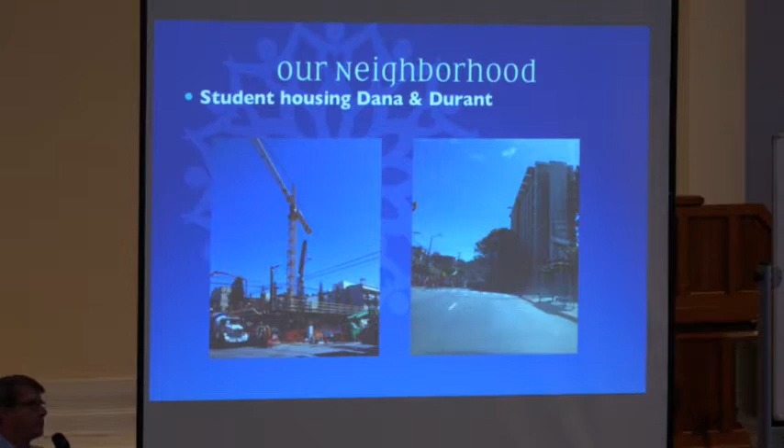And no affordability. Rents are rising, and there's a real significant need for affordable housing development. And we have a surface parking lot that we're using, sure, we're using it, but there are probably higher and better uses for this chunk of property that we have. I think it's really important for us to think about ways that we can leverage that property to provide affordability for this part of Berkeley.

So some of the things to think about as we're considering the possibility, actually for all the projects we're thinking about, but especially for affordable housing development.

To do affordable housing, this would be something of a phased project. We would speak with nonprofit developers, look for an RFP, offer some input into what we'd like to see over in that corner of the property. But then they're going to have to go through a process of assembling the financing, getting the entitlements, thinking about the planning. It's going to take them longer just to undertake that. Even if we started construction on this in a couple of years, they would still be a little bit behind us. So we'd still have construction going on, but under separate projects, separate financing.

We have the opportunity to offer some input and preferences into how we'd like the housing to be developed. We can say we'd like this to be primarily for seniors, or primarily for the formerly homeless, any number of different opportunities, and then we're letting the developers come back to us and say how they would like to see use of that property, and we can choose which one we like the best.

The other thing is that it's their responsibility to do all this. It's not our construction project. It's not our financing. There are people who do this well, and we're not them. So let's let them do that.

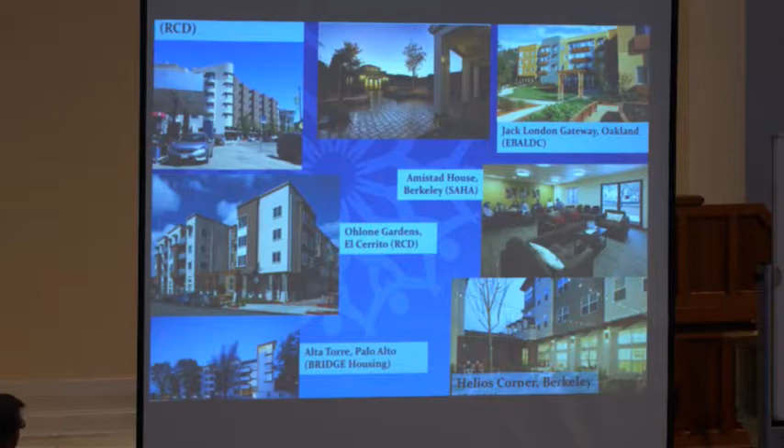We'll skip this one too, and this one too. I'm just mindful of time at the moment. We can come back to them, I'm sure, and we'll make these available.

Okay, so I'm also talking about the income side. And what I'm going to say is, I think everyone immediately jumps to, oh, we're going to have a capital campaign. And chances are good that a capital campaign will enter into a piece of this. But there are other ways for us to think about how to bring capital into a project without having to raise money from ourselves. So that's partly what this is.

So I've thought about the potential for us to generate additional income from the space that we would be developing over on Pilgrim Hall. For option 1, which really is essentially the same amount of square footage, but fresher, more useful, I think it'll be more attractive to outside parties wanting to come in and make use of the building. I thought that it could probably generate somewhere in the neighborhood of $25,000, maybe a little bit more in annual rental income, using some kind of market rate assumptions about what debt would look like that services a $400,000 or a $500,000 loan.

So we could borrow it, but that rental income would pay for that service. That's the exact model of what we did with Plymouth House, where we ourselves financed the renovations to Plymouth, and then the East Bay School for Boys is paying us rent payments that allows us to pay that debt.

For the second option, which provides about 5,500 additional square footage, and of course we've gone back and forth about the different spectrum sizes, but there are a range of uses. We could have nonprofit organizations making some permanent use of that space for their offices or their programs. The East Bay School is likely going to want or need to expand. They could make use of our classroom space and rent that as well.

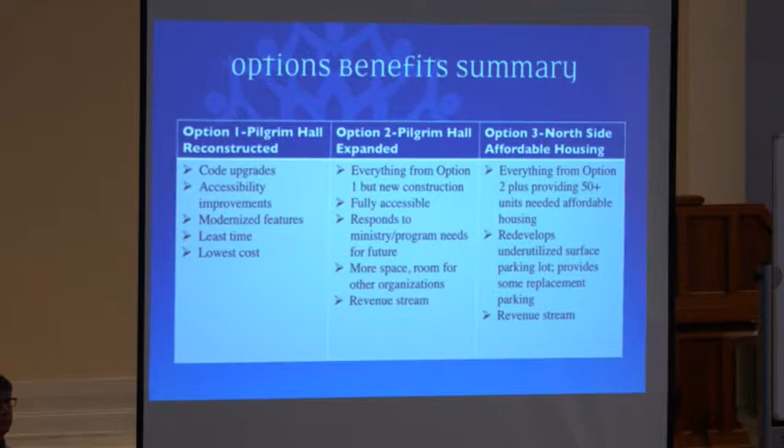So if you're in favor of 3, then you also vote for 1 or 2? So this is why you're going to get 3 whole dots, right? And you can use your 3 dots any way you want. The idea is — and it's really important to understand — that 3 is not an exclusion. If you're interested or feel that God is calling this church to create affordable housing, which is option 3, you still have to decide between what you're going to do with Pilgrim Hall.

So what's going to happen now is we're going to go to lunch. You're going to go get burritos. You're going to sit in groups with people, hopefully that you don't know, with one person from the Blue Sky team, and everyone is going to get 3 dots. The colors don't mean anything, it'll just look pretty.

Outside, I've put up 3 poster papers, one that says option 1, one that says option 2, and one that says option 3. Everyone's going to get 3 dots, and no selling or trading of dots. But if you think that one option is really what you feel you're being called to, and what the church is being called to, you could put all 3 of your dots on option 2, or 1, or 3. So this is just a way of gauging the temperature of where you are right now.